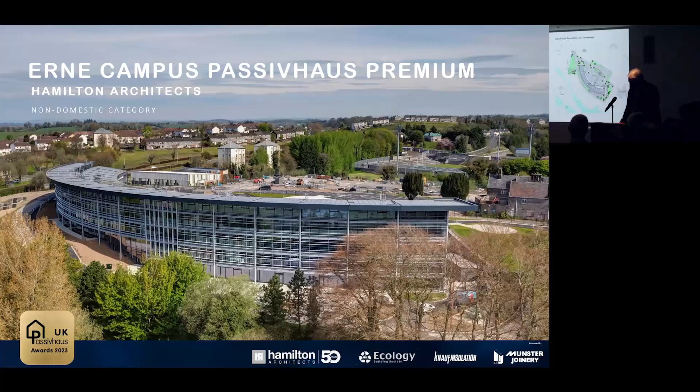There were three central design drivers: educational requirements, the Passivhaus brief itself, and our response to the site. The result represents a true landmark in the town of Enniskillen. Its fully glazed 200-metre-long atrium affords spectacular views across the River Erne and enhances internal legibility. The design responds to the context of the sloping site and curved boundary, and the roof features 3,000 square metres of PV panels.

Good afternoon. Internally, the building has a treated floor area of 7,167 square metres, which includes a large feature atria towards the north facade. The ventilation system within the building is a mixture of mechanical and natural ventilation to deal with potential overheating.

All the classroom ventilation systems are monitored for CO2 and temperature control, reacting to the demands of the building and associated energy use. The shape of the building and the main atria provide significant natural light, which is a key feature, complemented by daylighting sensors to ensure lighting levels are minimised throughout the year. The energy performance of the building has been quite spectacular, I suppose.

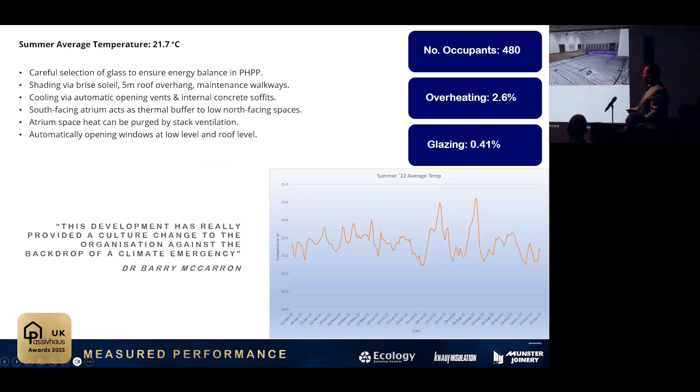As mentioned, the atria space is ventilated through stack ventilation. The building is largely served through a combination of underfloor heating and some air heating in some instances. The main frame is steel with timber frame wall elements.

A huge part of the design process was reducing the thermal bridges within the project. The north elevation is highly insulated timber framing, clad in brickwork and coloured fibre cement boards. Again, thermal bridging was a huge aspect of the design.

For quality management of the project, as part of the design process there was an awful lot of analysis done through the Passive House Planning Package, carefully coordinating the different manufacturers and detailing around the design.

On site, there was very much a collaborative process with the contracting team, learning together, gaining experience together, and that was collaborative from day one. There was a huge upskilling process with the workforce on the contractor's team, making them aware of Passive House, the principles behind it, educating them on the do's and don'ts, and ultimately helping to deliver a successful scheme.

Clerk of Works were present on site to record progress, deal with queries, and convey that back to the design team. Again, that open dialogue was hugely important between the design team and the contractor.

Industry engagement, speaking to specialists, getting feedback and lessons learned, was a huge part of the project as well. Ultimately, air tightness as a key characteristic of meeting the Passive House standard was something we were all very focused on, and we actually bettered what was tabled in the design. We achieved an air tightness of 0.3 in the final assessment.

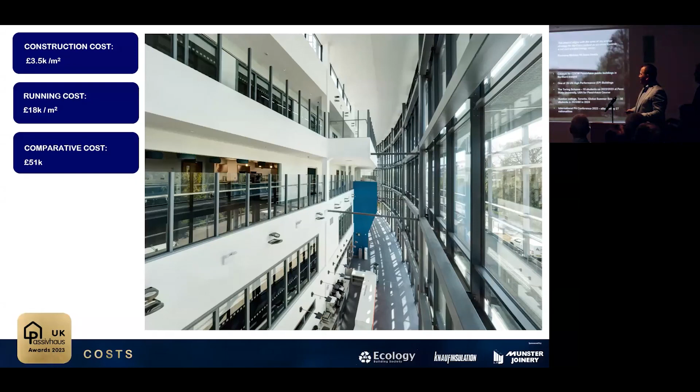This is an exemplary project for many reasons. It's proof that Passive House principles can be scaled up to a large building. The pioneering design has encouraged in excess of £250 million worth of Passive House public sector projects in Northern Ireland. And as you've just been informed, the campus has won many awards and accreditations.

So why does Erne Campus deserve your vote? Because, and I hope you'll agree, it's exemplary, it's pioneering, and it's inspirational. Thank you.

The impetus for this project stems from the college's long history working in the area of sustainable development, and in particular the curriculum to support sustainable development in this area. So when the opportunity presented to build a building, it made perfect sense that we would want to bring all of that experience to bear and build an exemplar building.

We went for Passive House Premium because we had already built a Passive House building in the form of the Crest Centre, and also in 2019 the UK government declared a climate emergency. So going for the best in class, the best standard we could build to, was an aspiration of the governance of the college, and that will future-proof the building.

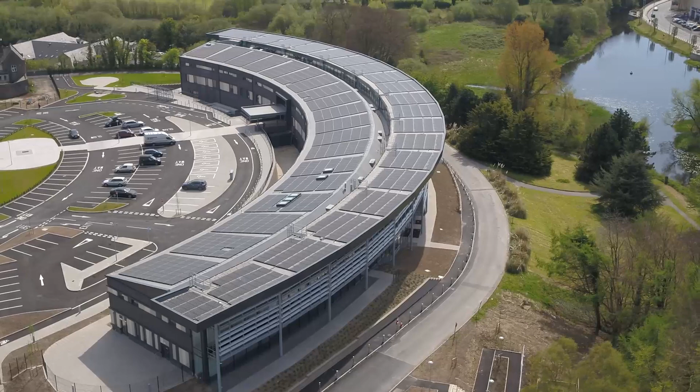It's the world's first Passive House Premium educational building and the largest Passive House Premium building recognised in the UK. The South West College and all of our staff, students and everyone who comes to the college is extremely proud of this wonderful project. I see it really as the jewel in the crown of our estate because it delivers such a great learning environment.

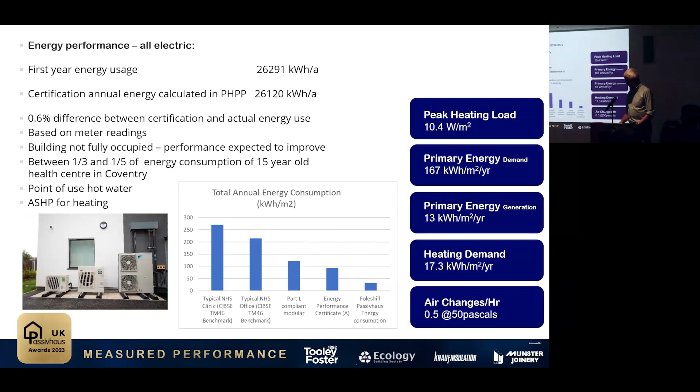But the main challenge for the building is ventilation. NHS technical standards require a lot of air changes. We have 5 consulting rooms for doctors within the health centre, and 2 treatment rooms. Treatment rooms are where you might go to have a dressing changed or some other procedure carried out by nursing or doctor staff. And when those procedures are going on, we need 10 air changes per hour. So if you're used to a passive house standard of 0.3 to 0.5, you need a bit more than that.

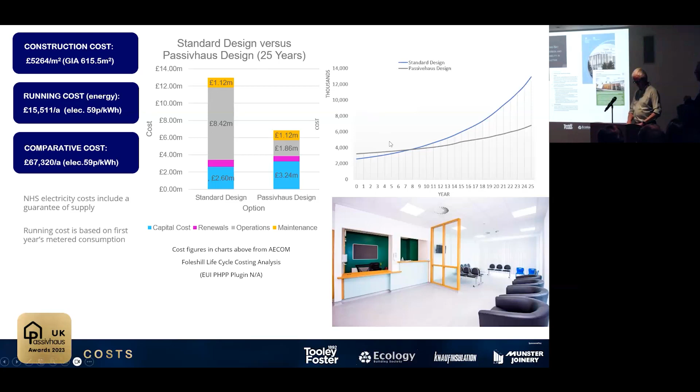We'll just do a quick closing one—I think Julian has done that. The last one is a quick slide on the cost: it's half the price of the equivalent building over 25 years. It's also been published a lot for the government. And the last one is all the people we've done it for, which is the people of Coventry. Indeed, thank you.

The fundamental brief from NHS England is a 10,000 patient list GP practice. So we proposed that we'd use Foleshill as a pilot study, the first passive house healthcare building in the UK. The business case is predicated on the potential savings to the health system. Over the first 25 years, this building is likely to cost about £6 million. A traditional build would be double that.

The brief was use of off-site technologies. We can access the NHS SBS framework, so we had a conversation with a couple of the framework contractors, formally appointing Portakabin to deliver this scheme. We had a flat slab on one day in December, and 3 days later we had a watertight building.

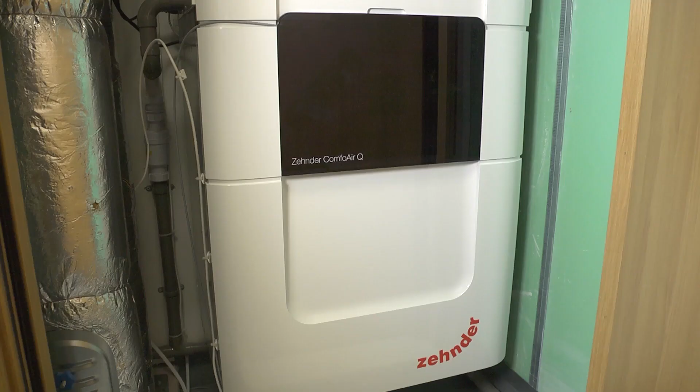The ventilation rates are higher in order to control infection. In the treatment rooms, when treatment activities occur, the air change rate for those rooms is 10 air changes per hour. So in order to meet that standard, we actually had to have one MVHR unit per room for each of those two rooms in order to be able to boost it when dressings were taken off.

There's potentially infections in the air. The performance data, the energy consumption for the building is all exactly as we forecast, and that is a testament to passive house design. This building has proved that the financial reasons for building it are the reasons for doing it, and you get the health and the energy savings as well.

Great, thank you guys, absolutely fantastic project.

Okay, now let's turn our attention to our final shortlisted project in the non-domestic category. So I am thrilled to introduce Hackbridge Primary School, which is a shining example of what can be achieved. It's been designed by Archetype, and it not only boasts remarkable low energy demand, but also generates renewable energy on site. So it's a really exceptional project, and it really helps to show the power that Passive House has in creating really sustainable and inspiring spaces for our children to learn.

So I'm going to introduce Christian from Archetype, who's going to go into a bit more detail on the project for you all.

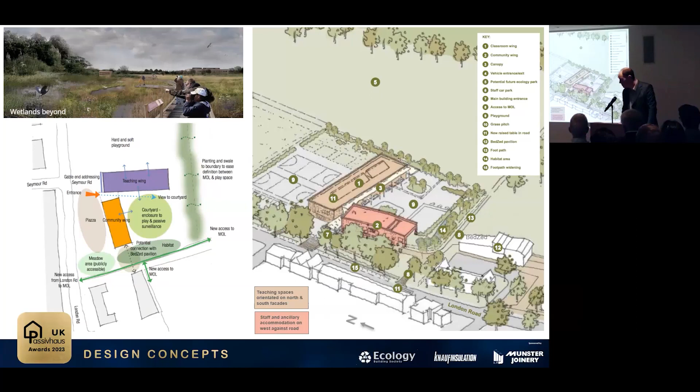It really is an amazing space that inspires the children who are there. High quality sweet chestnut timber cladding was chosen to complement the beautiful site in a pattern that's been described as high-tech log cabin.

We designed the school to be optimum for learning, providing great daylight, high ceilings, excellent air quality and acoustics, and an elegant colour scheme that really enables the highest quality of pupils' experience. The pupils also help to bring their own character through co-creating the wildlife artwork situated throughout the building.

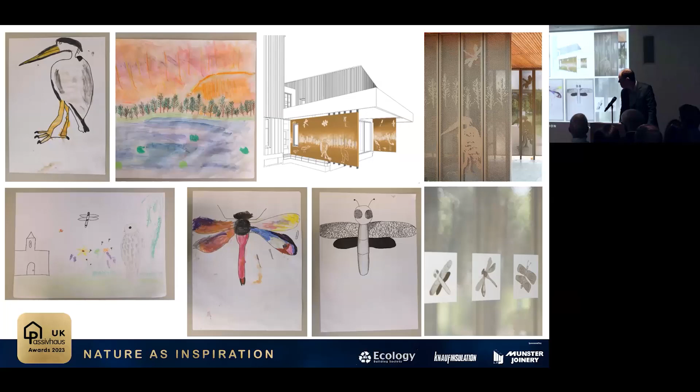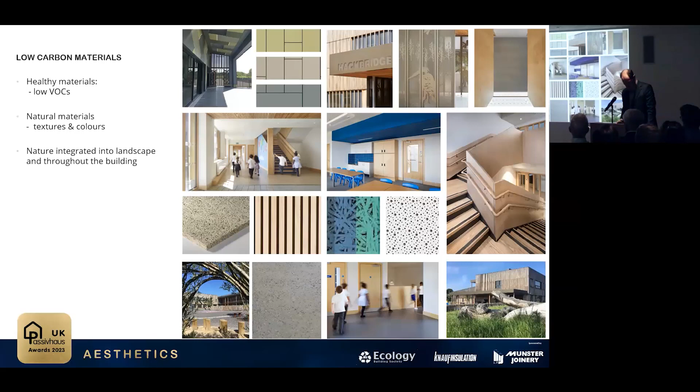On top of this, and on top of the benefits of Passive House, we also look to use a materials palette with low VOCs and natural finishes, which all help to significantly reduce and drive down upfront embodied carbon. So the A1 to A5 is actually only 499 kilograms of CO2e per metre squared without sequestration, or 405 with, which is a really ambitious figure for a primary school of 2 stories.

The design carefully considers orientation, and the amount of glazing on each facade is carefully designed and shaded correctly, with overhang, brise soleil and timber fins on the west-facing facade.

The head teacher and pupils love the space, and they notice the difference between this school and their other schools as they transition between the two.

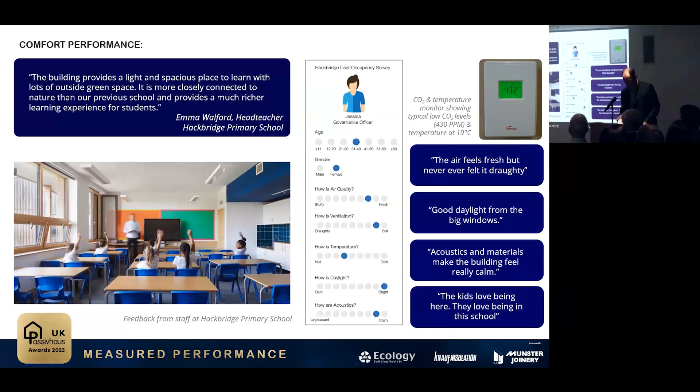We're undertaking building performance evaluation and are confident that we will achieve zero carbon in operation later this year. But it's already significantly above the DFE, LETI and RIBA energy standards.

In terms of construction lessons, going from Passive House to Passive House Plus requires a lot more technology, which can have benefits such as this bio-solar green roof, or the ground source heat pump and thermal store with its free cooling providing resilience against a changing climate. But it also makes it more complex, with challenges around maintenance and delivery of performance of the new technologies rather than the building itself.

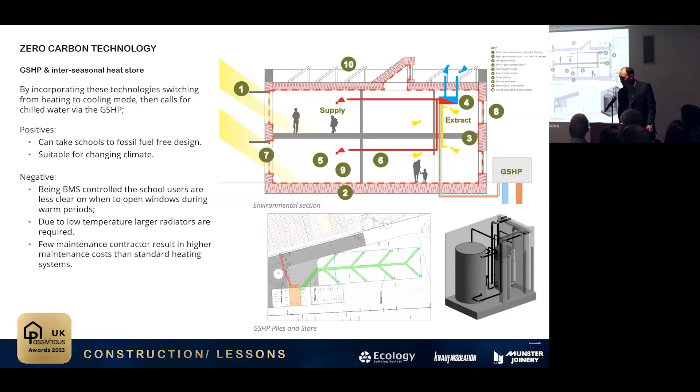But the Passive House standard really does help to ensure that high quality building is delivered. Even through the challenge of the first contractor going into administration, the team worked with the new contractor on site, were clear on the objectives, quality and standards that needed to be met to achieve the final delivery.

The majority electric building costs less than the electricity bill section of a typical school. And those savings, already some £11,000, become even greater as fuel bills rise. See the orange estimate for the changes this year.

With only 15% cost lift for the first ever Passive House Plus school compared to the national average in 2016, of which most is likely from its London location and the high quality materials and other things used, it really indicates that this standard should be readily achievable at or near cost parity going forward.

The exemplar project has been shared widely to really ensure a higher bar is set in our educational design standards, with tours on site with the UK Green Building Council, showing it to the Department for Education and even a member from the Committee on Climate Change, as well as being featured in lots of publications, setting out that the future of education really looks like this building.

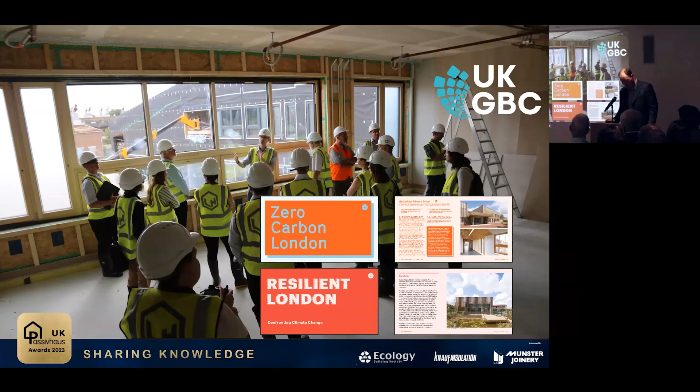We think this project deserves to win, not just because of the above, but because it truly demonstrates sustainability in all its forms. And it's inspiring, and it improves the lives of those attending Hackbridge Primary School.

As my son said this morning when he went to see it previously on an RIBA tour, it's fantastic. Why can't I have a school like that? Thank you.

The setting here is so special. It's a perfect environment for kids to discover nature, for them to explore, for them to learn about the environment.

The site is on a very protected area of the Metropolitan Open Land, just next to BedZED. It meant that in order to get planning, it needed to be very light touch in terms of materiality and in terms of operational carbon performance as well. So Archetype put forward the proposal to go Passive House Plus.

I want you to, in this lesson, think about what makes our school eco. What do we do at Hackbridge Primary School to make our school eco? We've got like solar panels on the roof. And what does that do, why? To save, like, electricity.

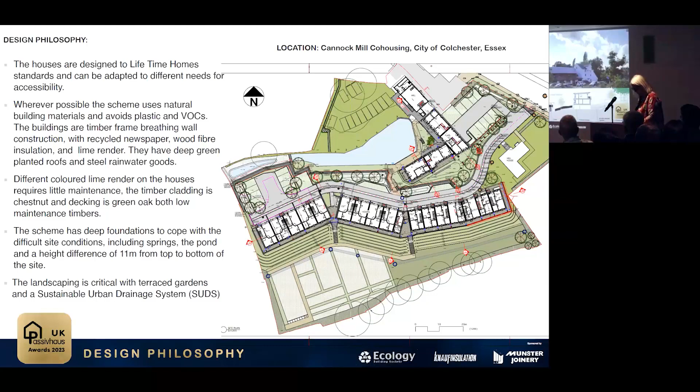The houses are in 2 blocks, one with a passageway, which you can see here, to allow springs and wildlife to reach the pond. 6 flats make up the 3rd block, just over there at the top, next to the listed mill. The site has a large mill pond, with an 11-metre difference in height from top to bottom. The project is within walking distance of the city centre, but sits within the green valley of the River Bourne, bordered by busy streets, including the locally listed Miller's House and the mill.

Deep green roofs hold back rainwater, which is slowly released via the rainwater pipes to the porous road surface, and then filters into rain gardens and into the pond, and finally into the river. No surface water goes into the public drains.

Landscaping makes the most of the existing mill pond. Everyone has private as well as communal space, and here vegetables and fruit trees provide produce for the meals in the mill.

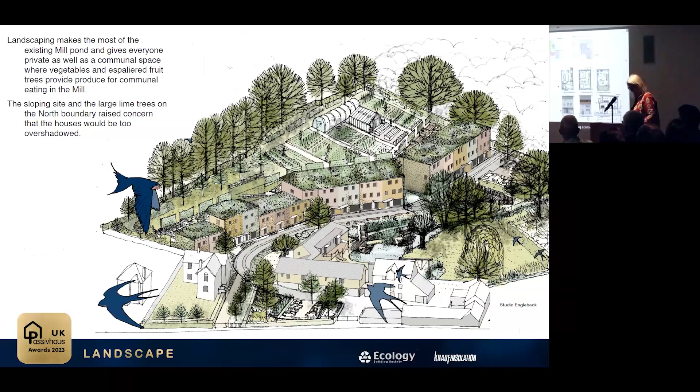Concern that the houses would be overshadowed by the trees on the north-sloping site led to living rooms and balconies on the top floor. The houses and flats are designed to lifetime home standards.

The floor construction allows for a lift to be installed. Staircases are wide enough for a chairlift, with future openings for hoists, etc. Plywood, bamboo flooring, and natural paint finishes create a recyclable and low VOC environment.

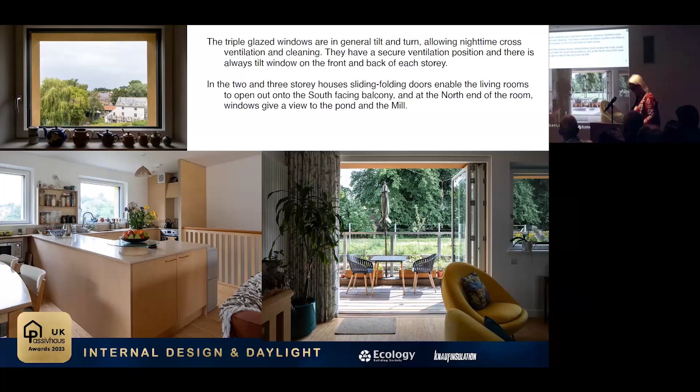North-facing windows give a view to the pond and the mill. Sliding folding doors enable living rooms to open out onto the south-facing balcony, and garages to be multi-purpose — for example, 2 pottery studios and a grand piano, all facilitated by car sharing.

Our PHPP predictions were pessimistic; the houses are more effective than anticipated. The balconies form a means of escape, enabling an open layout where warm air rises to the top floor living rooms. Several occupants have actually taken out the only top floor radiator.

Households tend to be smaller than predicted, and cooking and eating together saves energy. By sharing monitored results from the first year of occupation, the group has seen the value of adapting to and sharing passive house principles, such as nighttime purging.

The summer comfort strategy for houses and flats includes MVHRs with summer bypass and good cross ventilation for summer purging. Tilt and turn windows are secure when open. Houses are away from the main road, so noise is not a problem.

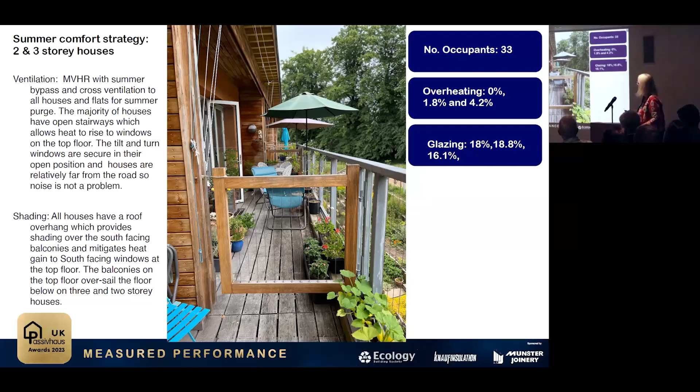3D modelling showed that overhanging roofs would provide shading over the south-facing balconies, mitigating heat gain to the top floor. These balconies also oversail the floor below.

A co-houser said, "I see the sunrise from my bed in the morning, have lunch on my sunny balcony, and fresh air circulates through the house all year. I'm amazed that my heating and hot water costs less than the internet. But above all, I enjoy a peaceful sense of well-being from the light and airy rooms, the bamboo floors, the natural wood staircase, and thoughtful layout."

South-facing windows on the flats have metal external Venetian blinds for shading, security, and privacy, and allow the tilt and turn cross ventilation.

At night, the scheme has a gentle glow, which is just enough to see around the site and get home after a few drinks in the mill, but allows the night sky and nightlife to flourish.

Coloured lime render on houses requires little maintenance. Timber cladding is sweet chestnut and decking is green oak, robust timbers. Windows are factory finished or stained.

The grouping of incoming services in the external cupboards simplified achieving airtightness. Inside, webbed I-beams are used for service distribution and a 25mm service zone in the inner skin of the construction. Combi boilers are easily maintained and MVHR controls are straightforward.

The stud wall timber frame is clearly applicable at scale and could have been greatly simplified on a more straightforward site. Cost limitations restricted the use of energy generation, and we concentrated on fabric first. Blown insulation was economic and efficient, supplemented with wood fibre and sheep's wool insulation.

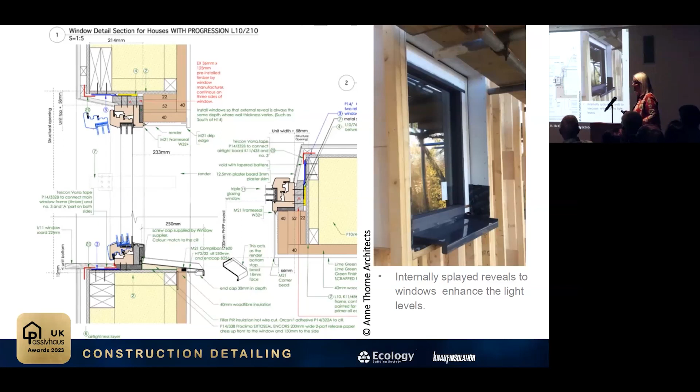What was special about this build? The use of natural materials and breathing wall construction, a challenging north-facing site, a listed mill, and a pond required a bold and compact solution.

The integration of the SUDS system to mitigate against future flooding and protection of wildlife, the incorporation of lifetime home standards, the positive response and involvement of the occupants in the design. And last but not least, the scheme was self-financed by a group originally of 8 households, growing to 23 during the build process.

What would you do differently? Insist on suppliers' installation and better supervision, particularly of plumbing and door and window installation. Use a nominated timber frame subcontractor from the outset for greater involvement in design.

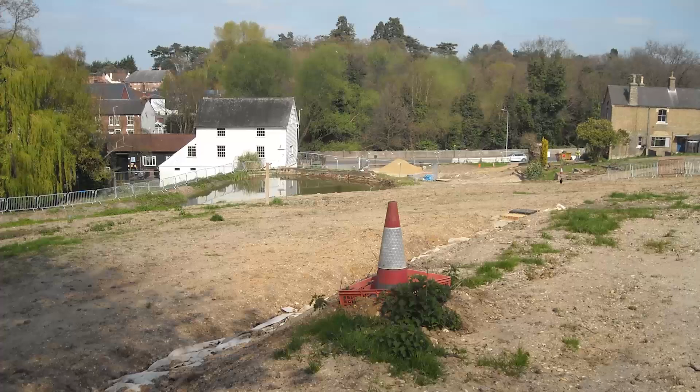It's quite a difficult site. It's 11 metres from top to bottom and north-facing slope. There's also a lovely but challenging mill pond and a Grade 2 historic building.

There were 8 households who bought the site, and with those 8 households we came up with the fundamental design of the terrace, so the mill was perfect for the common house. There was a limit to what we were allowed to do there, but the houses we made to the best passive house standards we could afford, which was Passive House Classic.

I was slightly dubious about the claims made for Passive House, and it exceeds all expectations. It's just luxury because the temperature is even, the air is fresh, and the Passive House really works for me.

What a fantastic project. Thanks for sharing that one, Anne. And it sounds like a fantastic set of clients as well, which is lovely.

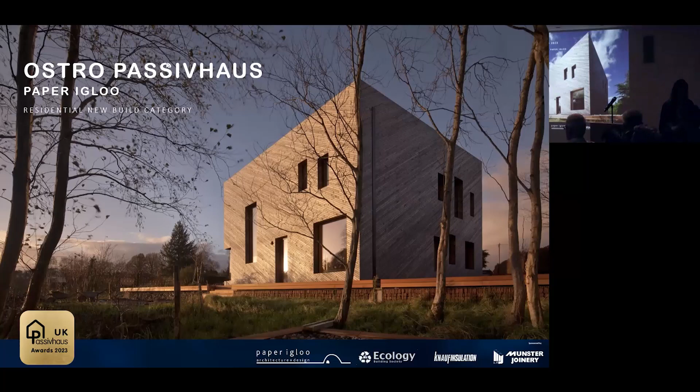Hi everyone, and thanks Sarah. Ostro Passivhaus is a detached family home in central Scotland. In 2017, the building achieved classic certification. It also meets multiple voluntary sustainability standards, has low embodied carbon, and is a dynamic piece of contemporary architecture. The project was mostly self-built by myself and my husband Martin over a 6-year period.

This site is out with the conservation area in the village, and in planning terms constituted a backland development. It's quite a bit lower than the main road, and as we had no streetscape to continue, and the buildings around are a mixture of ages, styles and sizes, we had a certain degree of architectural freedom.

We decided to purposefully set the challenge of designing a simple form with a clear hierarchy of spaces, yet create a building that was more dynamic than it perhaps initially conveyed - a building that could surprise, delight, and create comfortable, livable spaces while still celebrating the contemporary architecture that we love.

Our strategy for making decisions about construction was based on health, well-being, vapor permeability, and avoiding material toxicity. We attained all 8 aspects of the gold standard in the Scottish Building Regs, the highest holistic sustainability level above the baseline. Retrospective analysis has shown that the building exceeds the RIBA 2030 climate challenge metrics, despite all decisions being made back in 2013.

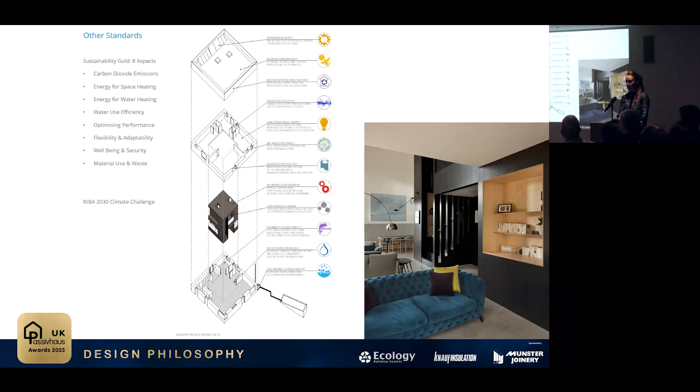One important gold standard aspect is water management. In addition to practical water saving measures within the building, we wanted to give the journey of the rain clarity in the landscaping. The sedum roof covering attenuates about 40% of the rainwater, and any excess empties into an overflow catch pit filled with reclaimed stones, and ultimately to a water butt and rain garden planter below some alder trees. This stone garden also provides excellent habitat for invertebrates and other small animals.

The site is steeply sloping, with almost 6 metres difference in height between the top and the bottom. At the lowest, southernmost end is a burn which flows in and out of the garden, and the building sits at the highest point to maximise views to the tree canopy opposite and across the field to the west.

The principle of form-following function led to this idea of a box within a box. The inner box is a tactile, timber-clad sculptural form present in every space. It is a functional, well-planned core containing all the services, circulation and hidden storage, and so serves the primary spaces to the perimeter. The open plan arrangement around it also creates a fun circuit, which friends, children and our cats enjoy racing around in equal measure.

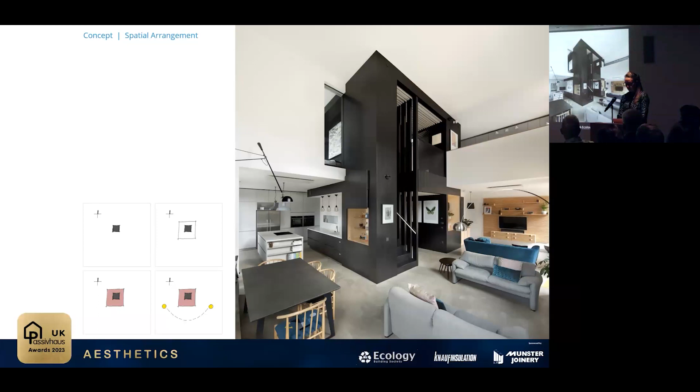The articulation of this core leads to contrast and drama by design. These purposefully darker, calmer spaces always end in daylight, drawing you through the building and leading seamlessly into the bright, well-lit spaces that connect you to the garden outside.

The outer box rain screen of naturally weathered timber cladding, with its seemingly ad hoc yet carefully planned fenestration design, is optimally orientated to take advantage of solar gains whilst avoiding overheating. Kippen has no gas, and some of our neighbours have regular coal deliveries, with oil remaining the predominant fuel in this and nearby villages. This was a critical motivation in our desire to create a low-demand building. In terms of energy consumption, the building is routinely performing within a few percent of the predicted demand.

In terms of heating, we have 4 relatively small IR panels throughout the ground floor, all individually thermostatically controlled, and no heating whatsoever upstairs. This house is the most comfortable we have ever lived in, and the only adjustment we've had to make is switching to a 4-tog duvet all year round.

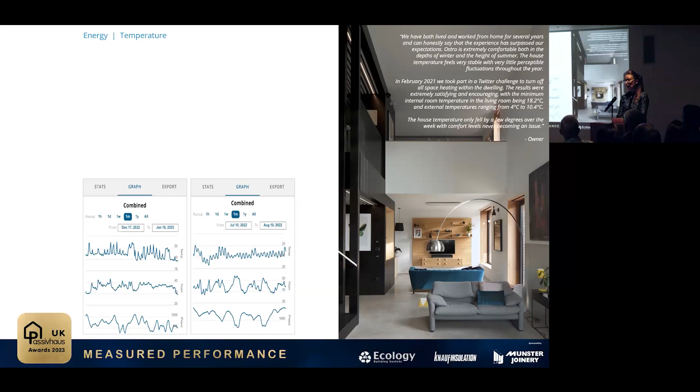are optimally positioned facing south with minimal shading. The building is usually occupied by 2, however, with family and guests, there are often 4 of us.

The certification frequency of overheating was 4% based on the usual stress test parameters. All rooms and circulation spaces have opening windows, so purge ventilation can also take place with bedroom doors shut, and we have 2 roof lights that we can open to increase the airflow.

We have a large double height space in the southwest corner, so numerically we had to offset this by paying particular attention to our psi values. We've continually monitored the temperature difference throughout the building and have found there is very little stratification between these spaces.

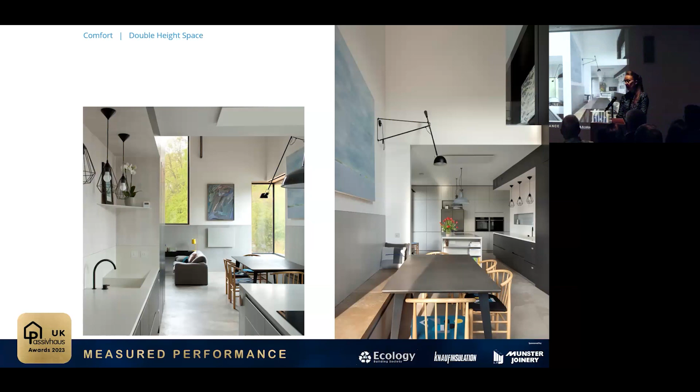We have no external shading devices on this building as we didn't require them to address the overheating. Instead, we utilise the deep reveals created by using natural bio-based insulation, and in combination with purge ventilation, this provides enough shading to be comfortable and gives us lovely deep sills internally.

Material and design choices were all guided by our approach to create a healthy, low-impact building. We paid careful attention to minimising waste during construction, completing the build with no soil being taken off-site and without a single skip. All surplus material was either recycled or passed on to others to use elsewhere.

We had a strong desire to keep the detailing simple to execute. At the outset, there were very few suitable timber frame companies in the UK. However, now we could use a specialist who would erect a bio-based frame within a week. I kept a detailed blog throughout the whole process to share our journey and hopefully aid others in their pursuit of a similar self-build.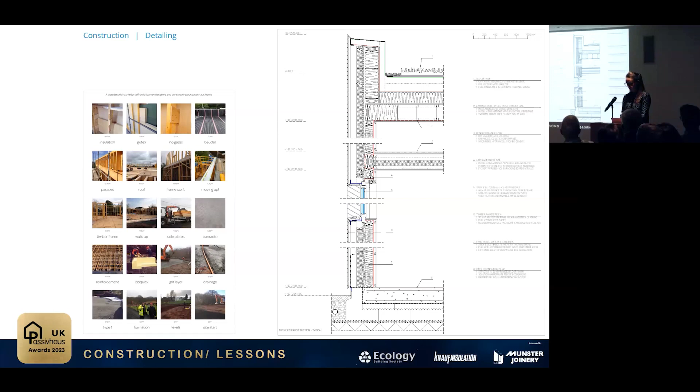So we built a Larson Truss timber frame over an Isoquick insulated raft foundation with an I-joist flat roof structure. The whole building is filled and finished wherever possible with wood fibre insulation, along with wood-based vapor open boards, one of which doubles as the AVCL.

A retrospective analysis confirmed that our material choices have created a very low carbon building. If the architectural features, such as the diagonal cladding and internal joinery, were stripped away, at its core, this building is of simple construction and straightforward detailing.

For us, this home is a demonstrator, combining contemporary architecture with an exemplary approach to sustainability. By caring for both people and planet, we can limit carbon emissions whilst maximising health and well-being through joyful and creative architecture. As it was a self-build, the construction cost was inevitably low.

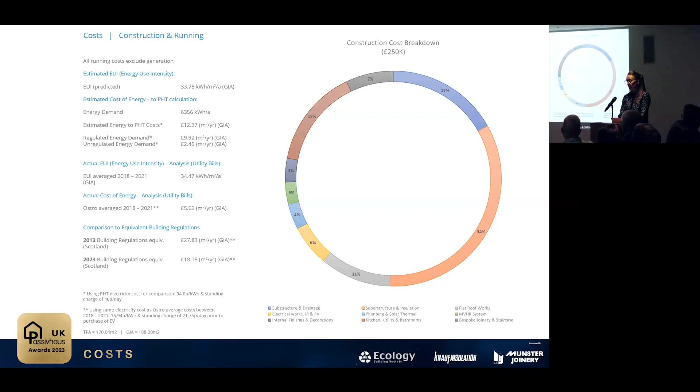Here you can also see running costs, noting both the Passivhaus Trust unit cost for comparability alongside our actual running costs before we got an EV in 2021. Ostro only uses 21% of the energy of an equivalent 2013 building regs building and only 33% of the energy of an equivalent building built to the 2023 Scottish standards.

For us, this house delivers a key message. The materials and technology required to achieve Passivhaus certified low embodied carbon buildings have existed for many years. The minimal environmental impact of this home is translated into a minimal architectural vocabulary. Nothing is unnecessary or superfluous, and all parts meaningfully contribute to the story of the building, its beauty and durability in the face of the climate crisis.

When we decided to build this house, we knew we wanted to adopt a fabric first approach so the building would minimise energy demand before turning to lots of renewable technologies. So to do that, we decided to go with Passive House.

We knew from the outset this would be a self-build and done on a tight budget, so although we got some support and help from our friends, the two of us built and finished most of this house in our free time alongside running our architecture practice.

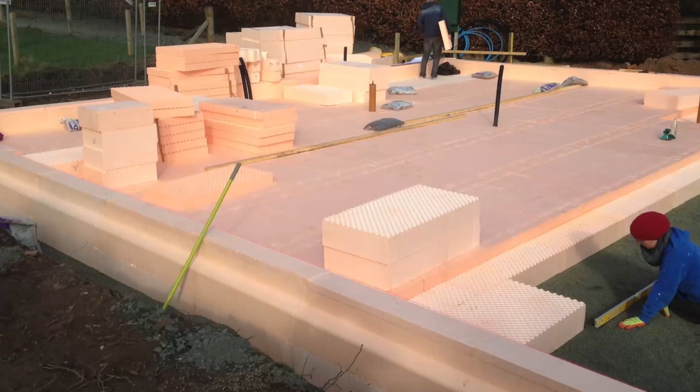In addition to Passive House, we wanted to make a really holistic, sustainable building, so we made careful material choices, prioritising natural materials whenever we could. We decided to meet the voluntary gold standard in the Scottish building regulations, which requires a higher level of performance in relation to other aspects such as acoustics and water saving, for example.

So our main goal was to combine these sustainable ambitions with a home that had some drama and excitement and overall is just a pleasure to live in.

Internally, the spatial layout clearly articulates the architectural concept, and so everything is organised around this exquisitely crafted, black-stained timber joinery element, a box within a box that houses the stair and all of the wet functional spaces and features secret storage compartments. This spatial arrangement then allows the living spaces and the bedrooms to receive all of the daylight and the views to the garden and the landscape beyond.

What we've enjoyed most since we've been living here is really how comfortable it is. The monitoring we've done has shown the predicted energy demand to be exceptionally accurate, and this experience has altered our company's course by embedding a commitment to design all new build projects to the Passive House standard.

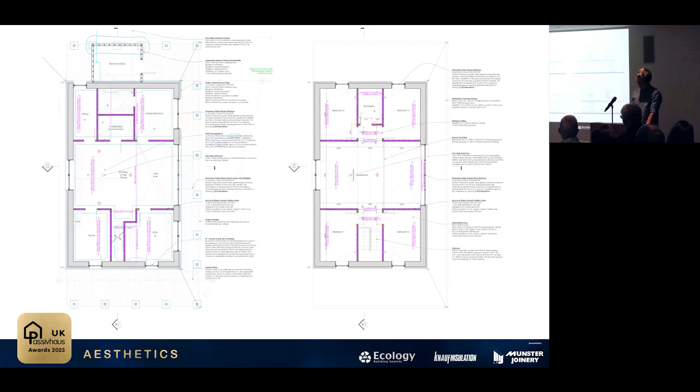The design has been carefully considered to maximise winter solar gains and occlude direct summer sun. This has driven the elevational design, with glazing concentrated on the southern aspect, protected by deep reveals and extended eaves. A veranda wraps around 3 sides of the house to augment the solar control and provide valuable covered space against the Welsh weather. Combined with summer bypass on the MVHR, these passive solar control strategies deliver 0% risk of overheating, with no need for occupant intervention to maintain comfortable internal temperatures.

Views of the wider landscape are presented through generous glazed openings off the double-height living spaces. A double-height volume connects these living spaces across the 2 floors, amplifying the effect of natural light and extending the outlook across the countryside. Window design establishes favorable ratios of glazing to frame to minimize heat loss and maximize the benefits of solar gain, daylight, and of course the vistas.

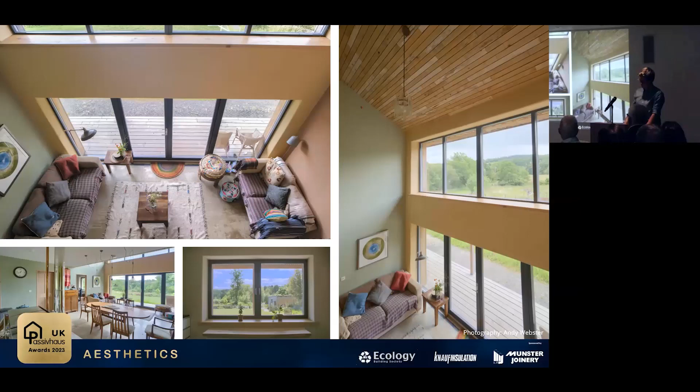The predicted EUI is inflated by the relative inefficiency of the heating and hot water supply, a wood-burning stove that sits in the middle of the house and on which meals are prepared. However, despite this focal point, the measured energy use last year totaled just 39.54 kilowatt hours per square meter GIA.

This comprised 15 kilowatt hours of electricity supplying the MVHR, lighting and other unregulated demand, and approximately 24.5 kilowatt hours of biomass, fulfilling heating, hot water, and cooking requirements. This is in part testament to the efficiency of the building, but more so the determination of the family to consume less.

Temperature and humidity were monitored throughout January and February, and as expected, the overwhelming trend is one of consistency. Regardless of external temperature fluctuations, internal temperatures were stable around 20 degrees. While humidity starts high, reflecting the recently applied clay plaster finish, it soon settles around 60%.

Similar trends are observed in summer. External temperatures varied from 10 to 34 degrees. Internally, the temperature range was 3. Humidity appears slightly more chaotic, but ultimately smooths the peaks and troughs to maintain a range of 50 to 70%.

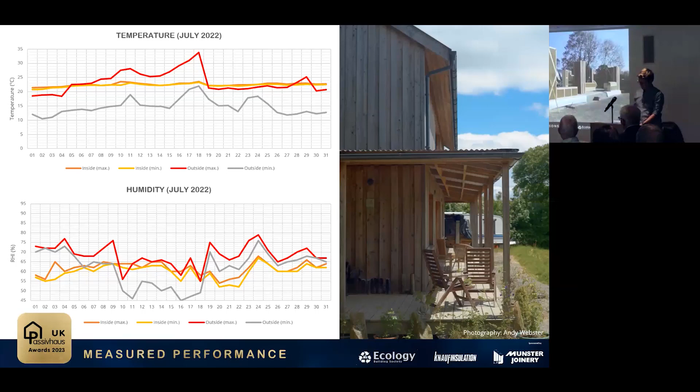As my first Passive House project, and one on which certification wasn't resolved until after building - obviously not recommended - specification of high quality and often Passive House certified components and systems ultimately made it possible.

EcoCon's certified SIPs comprise the majority of the external envelope, with foam glass installed below slab and blown cellulose between the composite timber roof purlins.

Using thermally broken straw-filled panels had the distinct advantage of a ready detailed range of Passive House compatible junctions, and they arrive in great hairy blocks ready to be maneuvered into position.

Hawkland Group, the experienced natural builders who put the thing together and now practiced Passive House deliverers, were on site and led the assembly, followed by Di Rees, who provided expert air tightness guidance to the clients.

Starting on site in the summer of 2020, we were very fortunate that despite the unprecedented events, the knowledge of the contracting team and robustness of the products delivered the building to the aspired standards.

Familiar to all good natural builders, the main concern was ensuring adequate protection to and detailing of materials to ensure they could easily shed water. West Wales is not known for its dry spells.

A huge challenge, and one wholly undertaken by the client, was ensuring an adequate energy strategy. As an off-grid development, Parker Rodin cannot import electricity to meet shortfalls on those consecutive dark winter days. This was critical in resolving to meet heating and hot water demand with biomass, as it greatly reduced essential electrical needs, allowing for relatively lean generation and storage capacity.

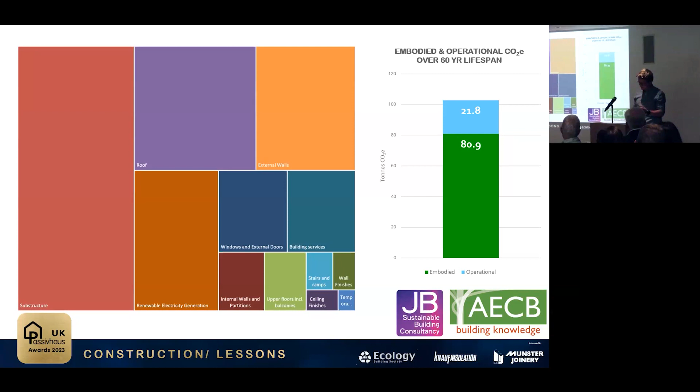Conversely, as all electricity was generated on site, the only operational costs incurred were biomass at a rate of approximately £2.29 per square metre of GIA, less than 10% of the equivalent building regulation compliant dwelling. Maturation of the development will see this reduced to zero, as on-site forestry is anticipated to meet 100% of biomass needs within 24 months. In its rural context, sufficiency is its greatest accomplishment.

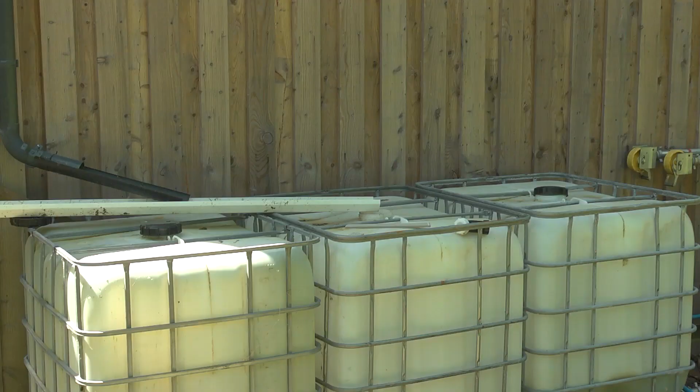So we applied for planning permission under the One Planet development scheme, which is a Welsh Government initiative where you can build on agricultural land, but you have to have a sustainable project, supply your own energy, deal with your own waste, have a zero carbon building, etc. So it's quite a difficult thing to meet all those requirements.

We didn't want to build lots of different buildings on the plot. We wanted to keep it all together, and we thought this is a very cost-effective way of doing it. So it needed to be a very functional, almost farmhouse, where we can process all our crops.

We always said if we are ever going to build a house, we want to build a passive house. The aspirations for this project have always been aligning with the One Planet ethos, which has really driven everything, all the choices. So we were looking to achieve something that would be low operational energy and low emissions for the lifetime of the building, but Brendan and Ludka were also really keen to make sure that it had low embodied carbon.

Overheating was a fairly critical aspect of this. We wanted to make sure that Brendan and Ludka wouldn't have to use any form of active cooling, and that resolved itself into the idea of having that large veranda-type canopy at ground floor and the extensive eaves at first floor, just to make sure we had protection there for the duration, rather than needing anything mechanical or operable during those summer months. In the winter it's nice and warm, and if it's a sunny day in the summer it's just cool, and it stays a constant temperature. When it's really cold it's nice and warm in the house.

This should be a standard way forward. Houses should be passive houses.

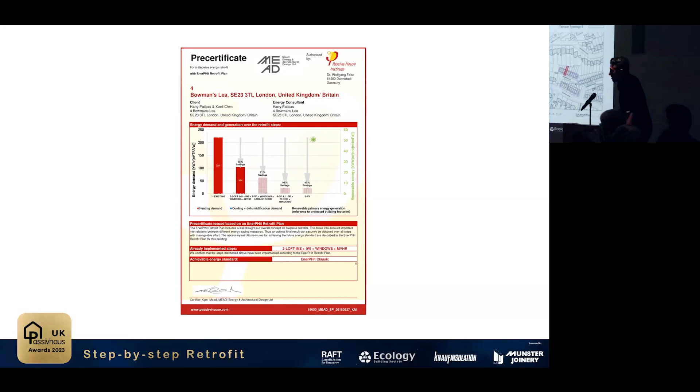We've had an enormous range of sustainable approaches on this project, including opening it to International Passive House Open Days, having Passive House students round on a visit, and we've also leafleted the whole community to try and reach beyond just this one project.

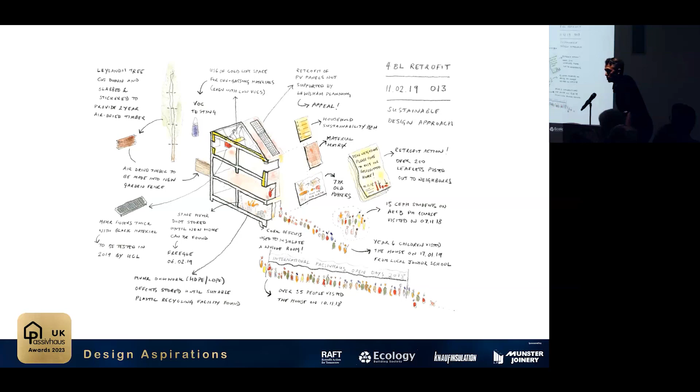The house now has triple glazed windows across the whole house. We are airtight, we have MVHR, we have come off the gas, we have an ASHP heat pump, we have solar panels on the roof, and a solar shading strategy. So we've basically put all our money into the performance.

It is actually unfinished inside. It's livable, but as you'll see in the video, we still haven't put all the money into the actual finishes. We have 3 finished rooms, which are the nice photographs you see, and we have cork finished multiple ways. This is cork with a fire retardant and a white paint, so you actually see the texture of the cork through it. This is cork finished in a different way.

And this is my son sitting down, which is quite rare. This really shows the deep reveals on the windows, created through the additional wall insulation. So we have cavity insulation and wall insulation, internal wall insulation.

Last year we made slightly more than the predicted amount from the solar PV, about 3% more, roughly 4,000 kilowatt hours, and we used 3,700, including charging a car. So we've really delivered performance, and we're delighted with this. Obviously this coincided with the energy crisis as well.

This is a quick thing about the solar shading strategy. I've long had a hunch that solar panels reduce heat gain in roof spaces, and my neighbours agreed to put a sensor in their loft space, and I have one in our loft space and one in theirs. I can report that our loft space is 2 degrees cooler at the height of summer, so it does have a small impact.

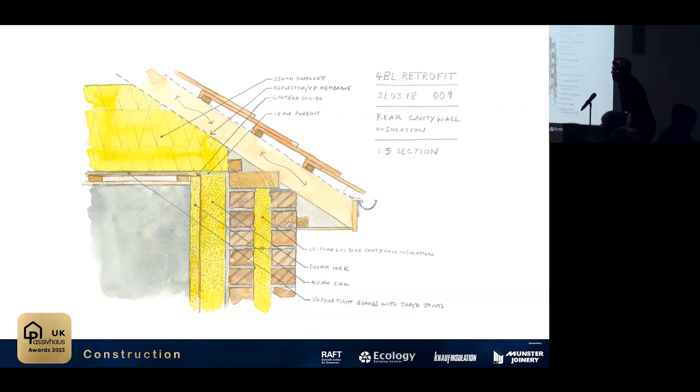This is a recessed area on the ground floor. We converted a garage into a new space, and this is just a bit of air tightness on the ceiling. We have MVHR, and on the video when you see lots and lots of air supply in the living room, that's because we're renovating the ground floor and we brought the MVHR up to the first floor. So if you're wondering what's going on.

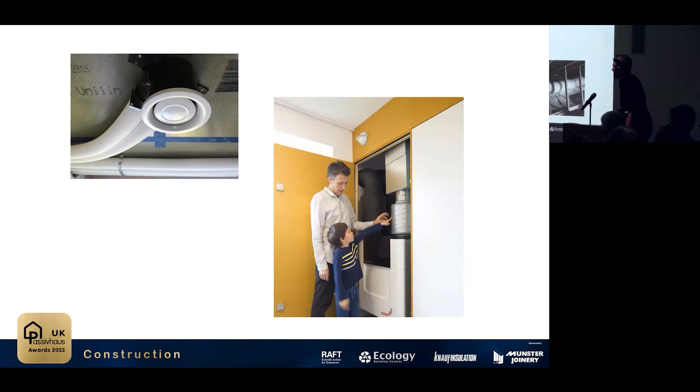So that was the insulation before. This is what we usually find in roof spaces across most dwellings and schools that we visit. And obviously now we have a really neat 350 mil of insulation. We've replaced the windows with triple glazing.

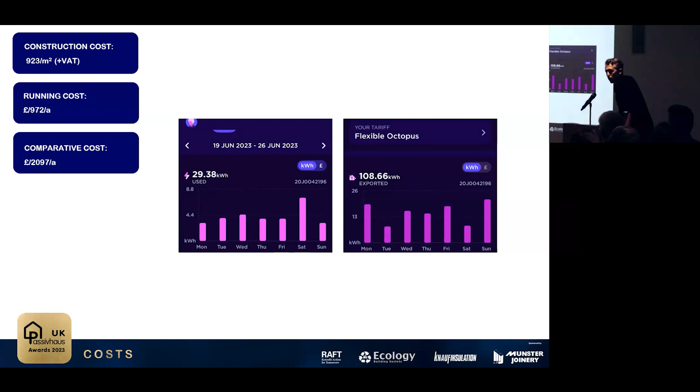We've monitored a lot - that's my son looking into a hole that I drilled in the cork in the wall, very excited. So we've been monitoring the hygrothermal performance of the house, monitoring air quality, relative humidity, CO2, and temperature. We've obviously got metering through Octopus, and we've also got Smappee, so we've got live energy monitoring for all of our circuits in the house.

Perhaps this is one of the most important aspects of the project - these are the 10 houses on our street. This is my son with a poster that we created for the climate march. He created a poster, and at the end of it he said, 'Now we feel warm.' It's a really important thing.

Number 8 has actually copied our exact windows, and they've put triple glazing in throughout their house. They're absolutely delighted, and they're also going to get solar panels soon. Number 1 are architects, and they've been picking my brains for retrofit solutions. Number 5 has put in double glazing and just put in cavity wall insulation.

That's Brian. TJ, number 2, has actually sought a lot of advice from me on asbestos. All the houses have asbestos, and me providing that advice has I think been really helpful to them because we removed it all from our house. He's actually starting retrofit work soon and going to be insulating his loft. Paul is number 9, and he is going to put triple glazing in very soon.

So here they all are, and they are all genuinely doing works. These are the types of fabric measures that they'll be doing, and these are the additional comfort, air quality and overheating measures.

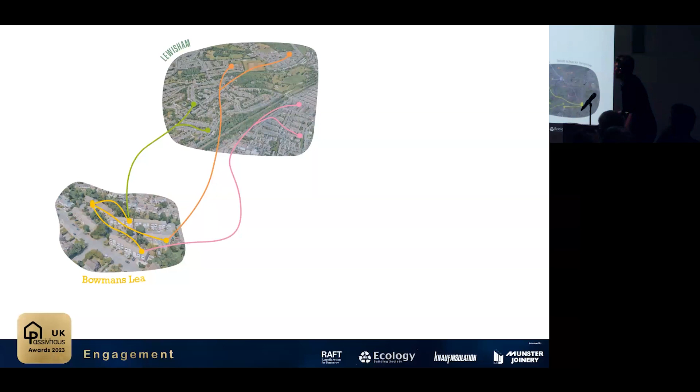Lastly, this is really about community retrofit. So we are influencing our local area, and we're really keen to let that reach beyond into the borough of Lewisham and then ideally spreading out across the country. I'm really happy to announce that Bob Pruitt and I are going to be writing a book. This is going to be published by the RIBA, a book on domestic retrofit, and we're just about to sign a contract - it will be coming out in September 2024.

What we've done is we've brought our work to bear from this house into schools. This is a drawing produced by Raft that shows how the interactions and engagement we do with schools is reaching out into the community. A lot of the learnings we've done on my house and other domestic projects we've brought to bear into the setting - this is a section through a school. We've actually brought our air tightness, engagement, MVHR strategies, and cavity wall insulation details to bear on those projects.

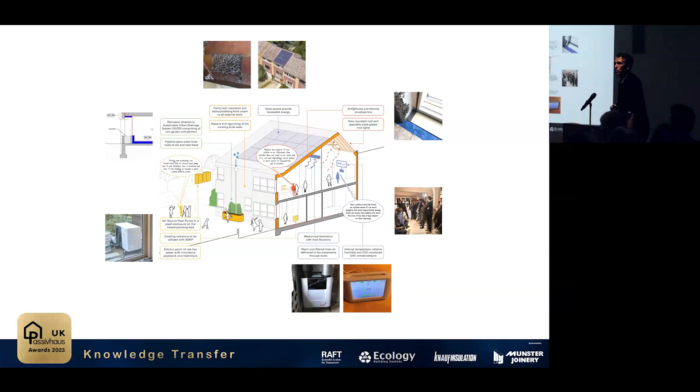This is some of the engagement we've done - these are all pictures around the house at different stages of construction. Actually what we found is a half-finished house is great for visits because you see everything, you can see all the details. This is the engagement work we've been doing with schools all across London, and this is a very recent output.

We're working with a number of schools across the borough of Lewisham. And I'm just going to end on this slide - but I have to say, we are very lucky to have freehold, we're very lucky to own our home. And I feel very lucky that we found Passive House as a way of delivering fantastic performance. So thank you very much.

Hi there, welcome to my house. My house is the UK's first step-by-step passive house retrofit. Come inside and have a look with me.

We've got cork insulation here to keep the cold air out of our house in the winter and the warm air out in the summer. Another triple glazed window, also fully airtight. These are filters for the MVHR system.

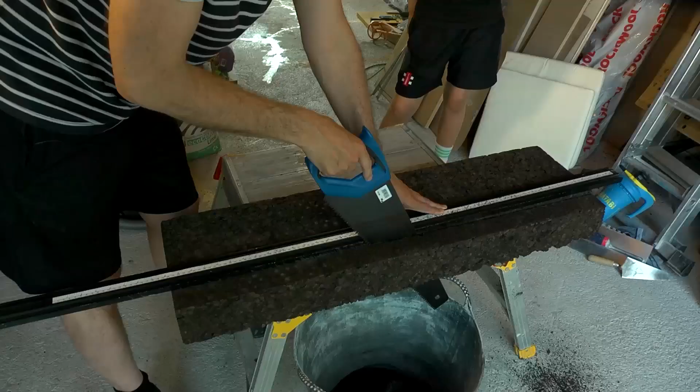Hi Dad, what are you up to here? I am cutting the very last piece of cork, and then I'll be mixing the plaster. Do you want to have a go? Sure, yeah, okay. So make sure you keep your hand on there really carefully. You don't move this because this is your guide, and then you just go up and down.

I've helped him before, lots, but I've never actually done some cutting. So that was a great experience.

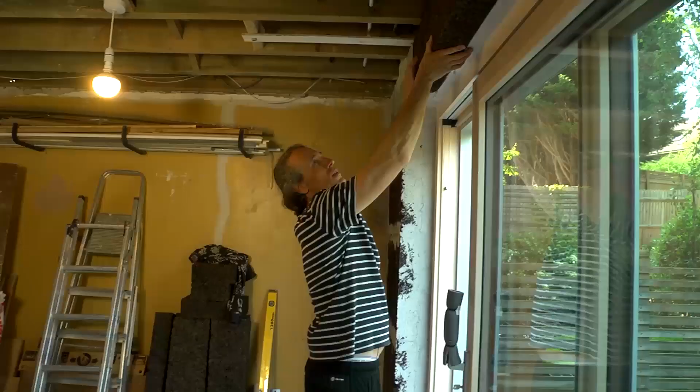There are certain walls around the house where he's had a go at plastering, like one on the landing upstairs. He showed a lot of interest, and the posters he made captured little moments of what we were actually doing in the house. And then your school teacher let you put them up in the corner of the room, didn't she? Yes. I felt very proud of myself because completely insulating our house is also very special.

What would I have to do to make it all nice and retrofitted? Take out your gas boiler and then replace it with a heat pump.

It was just a complete added bonus that Dimitri was genuinely interested in what we were doing. That led to his posters, which led to him presenting to his school, which led to us creating workshops in local schools, including his. And of course that led to the formation of Raft.

I've noticed, because I'm quite interested in that due to energy prices soaring, the panels on the top of the roof. The solar panel gets the sunlight and then creates more energy for us to use.

We want to work with schools, work with families, work with children, work with neighbourhoods like this, and try to encourage people to retrofit their homes. So there is impact. Here's to neighbourhood retrofit.

Absolutely fantastic. Here's to neighbourhood retrofit everywhere, I think.

I would like to welcome our next speaker, Heather McNeil from AD Practice, as she shares the journey of another suburban home—this time a 4-bed home in a conservation area. This project demonstrates how they were able to get to an EnerPHit Plus standard. It's a way for us to retrofit our buildings to lead in the climate action needed everywhere, but doing it sensitively to the architectural heritage of the area, which is also really important. They've maximized the use of things like photovoltaics, eliminated gas usage from the building, and got it closer to net zero carbon. It sets an example that can be replicated at a larger scale as we look to take this from the individual building to the neighborhood scale. So Heather, over to you.

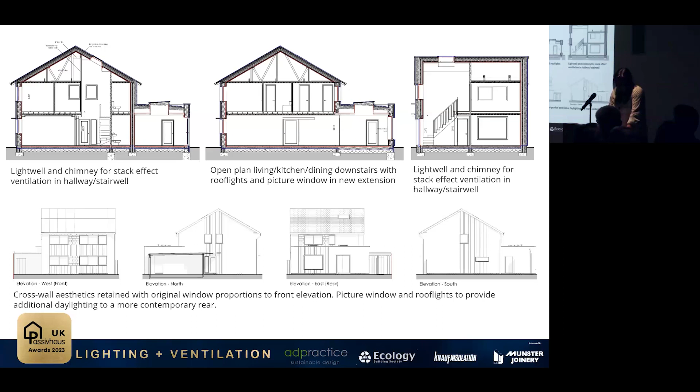So how's it working? Due to the amount of energy generation within the building, it is hard to quantify the exact proportions of energy usage, but it is clear it's outperforming the PHPP predictions by quite some margin. We've got actual heating demand of just 35% of the predicted value in PHPP, and primary energy demand is just 54%. The energy generation prediction was remarkably accurate at 97%.

In terms of why it works so well, a lot of it comes down to our clients, one of whom was a software engineer. He's installed a Loxone building management system, which controls all of the overheating strategies, as well as optimizing the usage of the solar PV to run the heat pump, charge the battery, and car charging in a hierarchical manner to try and make the most of the energy generation that they have.

The MVHR goes on summer bypass, and again the Loxone system in summer is configured to control the stack ventilation once temperatures reach the overheating threshold. It also controls the shading - there's external integrated blinds in all of the front windows and the master bedroom, again programmed with local climate data to prevent unwanted solar gains in summer.

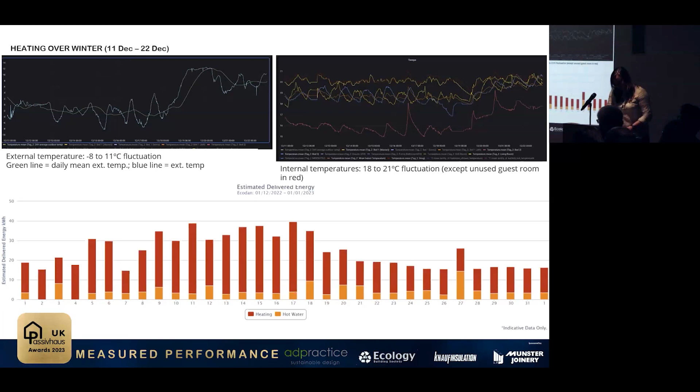In terms of our internal temperatures, they're fairly consistent year round. The living area varies from 19 to about 25, and the master bedroom, again, from about 18.5 to just over 26, which is too hot for a lot of people in a master bedroom. So despite overheating being very minimized within the PHPP, we did have to look at some additional cooling.

There's a few snapshots of some construction. I'd love to be able to talk you through it all, but I definitely don't have time to do that. But do ask questions later on if you have any.

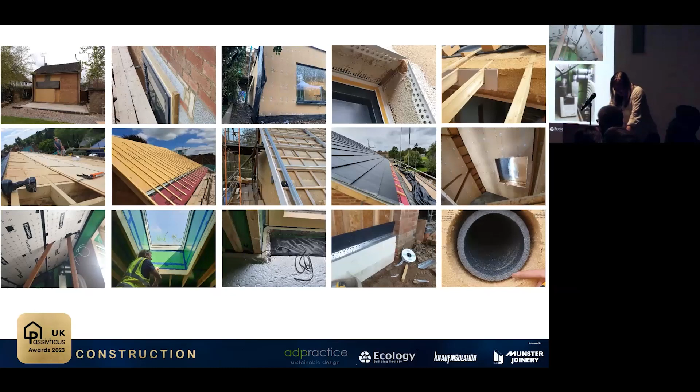Our client's main driver for the project was to reuse as much of the existing building as possible, none of which was straight or plumb, so it did make the roof particularly difficult to make airtight, and old external walls that travelled inside as part of the extension works also became very difficult to airtight, because clinker block apparently does allow air to travel through it remarkably well.

In terms of our buildability features here, I think we've touched on it before - it's certainly a replicable solution that we had. The cross-wall infill panel system is very common across the UK in properties of this age, and it is perhaps a little bit more bespoke than some of the external insulation options that we used on some of the flank walls, but certainly not beyond the wit of man to be able to replicate.

Most details we used were as simple as we could make them, but we did have quite an interesting insulated box beam, which you can see on our section detail here on the extension.

Turning to the embodied carbon, this is where it got a little bit tricky due to the high amount of solar PV that we have. So the headline figure is quite high, but recent reports have shown that PV saves roughly double the amount of carbon emissions embodied within the arrays. So it's perhaps not the most accurate reflection of where we're at in terms of embodied carbon. But because of the high sustainable materials that we use, the sequestering within the materials, particularly the wood fibre and timber products, left us at a net negative figure by quite some distance, and allowing for the fact that most buildings last for longer than 60 years, which is the average that people are rating within this system, it could be a lot more carbon neutral than it in fact first appears.

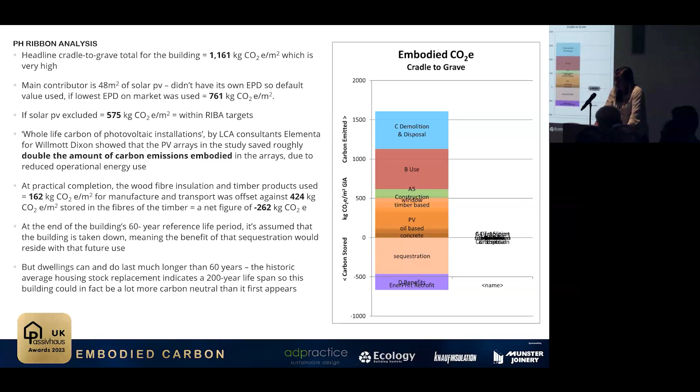Pre-retrofit, the clients were freezing, sitting under blankets, working from home, and had annual running costs of about £2,500, including both gas and electric. Post-retrofit, we eliminated gas, and their annual heating and hot water costs were just £93.56, so less than their internet costs, and the total annual running cost was £750. This has given us already savings of £1,750 a year, which are only likely to increase with increasing energy costs and the fact that they've now installed a large 10 kilowatt battery.

Finally, lessons learned. We're taking it forward onto future projects. As you can see here, we've got a PHI low energy building in St Albans in a retrofit situation on an end of terrace, which is perhaps a more replicable solution because there's many more of those. But I would say the main learning feature for us was the overheating aspect, and factoring in that PHPP only models overheating on an overall building basis rather than room by room. I do think it's something we need to think about, particularly on retrofits where we have less control over some of the orientation. Where we've got first floor bedrooms, we do need to look at how it can be cooled a little bit better because they are just too hot. So it's factored in for our future clients.

But yeah, I think take home point, if I can do it, I think any of you guys can. So thanks.

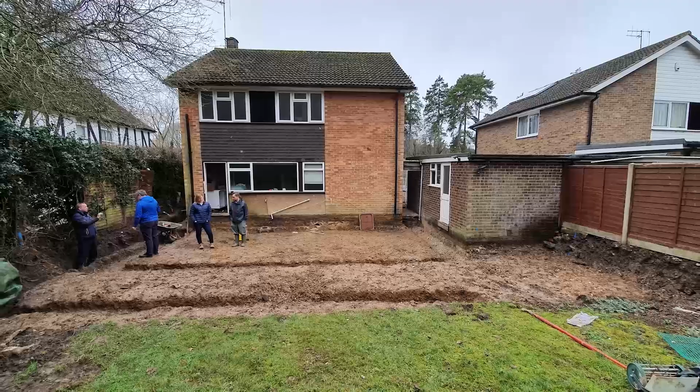But it was very dark. So I think our design driver was obviously make it a lot more efficient, but try and increase the amount of natural light throughout. Adding on the sort of box to the end, just to give you that extra bit of flexible living space. The floor was definitely the trigger point for, are we going to try and push for EnerPHit Plus? It's a lot of work, but it's not an insurmountable problem. Issues with old roof construction, nothing being straight or plumb. In hindsight, it would have been easier to replace it.

What's made this project more striking, with it being in the conservation area, is that you do have the whole front pitch as a solar array, and everyone knows it. The really nice thing about the passive house process from my point of view is traditionally on a build the client would just think about what the building looks like and a little bit about how it functions, but it invites a lot more curiosity. As a client you can actually be aware of what goes into the building, what's inside the walls, and I think that leads to better results.

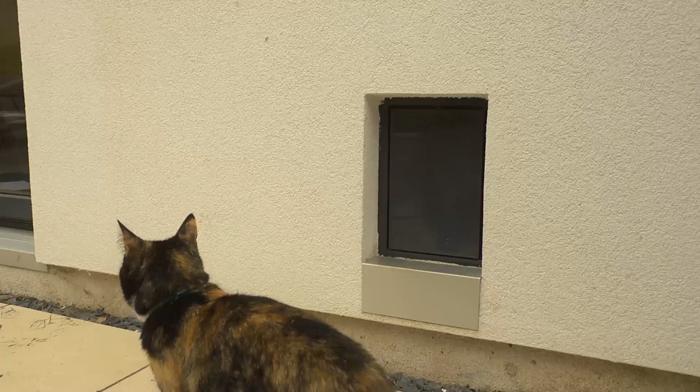I'm working away on the video call in t-shirts. At various times I've got colleagues under quilts with woolly hats and fingerless gloves, through to working in the garden in the shade because it's cooler than indoors, but I can work in here in comfort. It goes to show what you can do with a lot of building stock of this age.

Thank you, Heather, for that presentation. That was fantastic. I didn't realize this was your first project, your part 3 project. How fantastic is it for an architect graduating to design a building with no performance gap? Well done.

Amazing. That's great. Let's hope all architects graduating could do that. That should definitely be the aim. Okay, fantastic. So I want to introduce our next project.

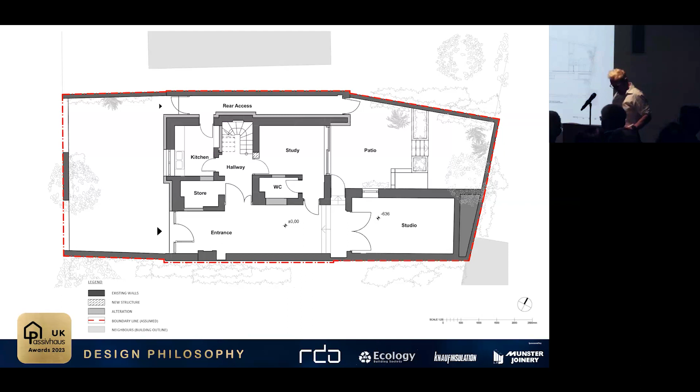The first floor, again, was simplified with walls removed, creating 3 bedrooms instead of 4, and having a reasonable sized master bedroom - before it was actually very tight. The new layout improves the connection with the garden, which is quite interesting because we've got a rainwater harvesting system in there as well, and there's a lot of circulation and reuse of the water in the garden.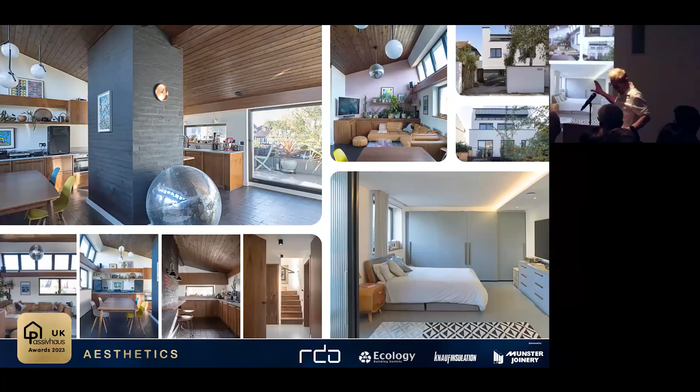This is the second floor main living space, one of the favourite spaces of the clients. Aline, she's here - a favourite, I think it's one of your favourite spaces, isn't it?

A lot of attention was given to the wooden joinery, which was really important as it keeps this 1960s aesthetic - we didn't want to lose that. The big issue was how do we lower the amount of glazing, and we had to triple glaze all those fan lights. That was quite an issue because before that it was single glazed, and that caused a lot of problems.

How would this work for future use? A lot of it was about the energy performance, but we replaced the roof with a solar roof - the actual solar panels are the roof. The heating demand is obviously lowered. We've got an air source heat pump, a Mixergy tank, all the help from Ecospheric, and a Tesla Powerwall battery, which, to be honest, made the building management system quite complex.

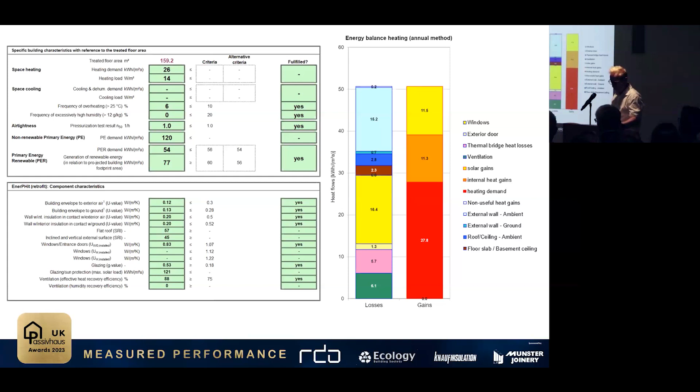PHPP estimates 6% of overheating per year. The total glazing is around 24% of the treated floor area, however this is balanced with the use of triple glazing windows on the east and west elevations. The summer ventilation strategy is planned so there's no need to open windows while the MVHR is in use. A large proportion of the heat losses are through the windows and doors, so that was something we really needed to be careful with.

Working with an existing precast concrete building and blockwork was really difficult - we had to think about how we would get everything into the tight spaces. We used an MVHR system, and the process of installing this was fraught with difficulty, including trying to incorporate all the ductwork into existing buildings. We're still monitoring the building and its use and adding tweaks as we go - it's only really been there for about a year.

There was a bit of a peak in the summer until we got our shading policy in place, and we've dealt with that now. The windows were taken out and everything was moved, and we got rid of the render on the outside. You can see the complexity of some of those junctions, which was really, really difficult.

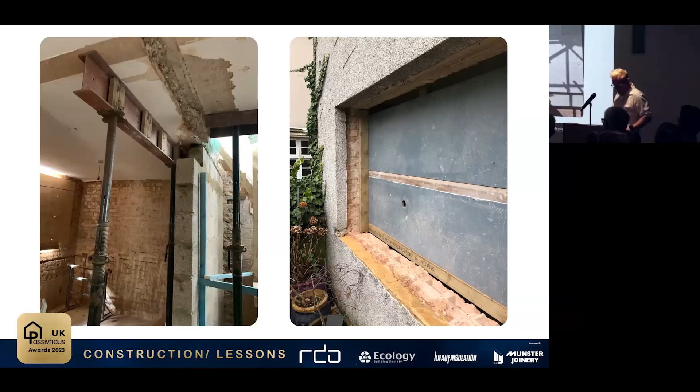Staggered insulation was used on the outside. The existing pebble dashing was removed and insulation was installed on the facade. Difficulties occurred at the junctions, particularly adjoining the roof with the exterior facade. On one particular side, with the top floor terrace, we had to work around the existing fabric - using both interior and exterior insulation to maintain level access to the terrace, as well as good head height to the internal space below.

The details were the biggest challenge, so we ended up spending a hell of a lot of time detailing this. The other issue is to monitor the process - how do you monitor the process, how do you deal with this?

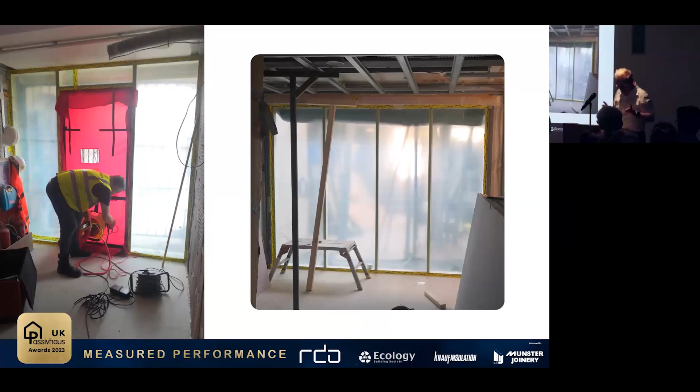What we did was air tests - we did air tests all throughout the process, and it was really important to do the air tests even before we installed the windows. That was something we monitored throughout the process and whilst we were going through it.

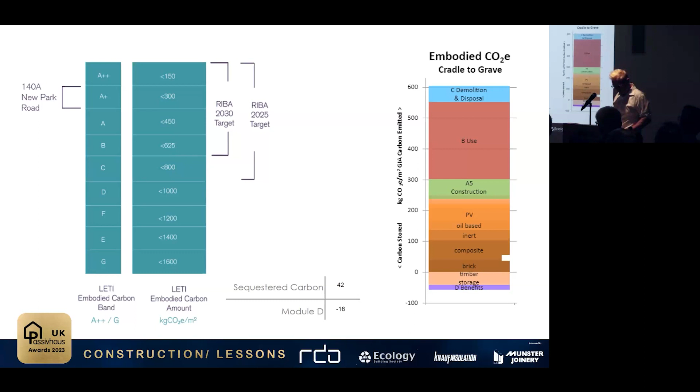Regarding embodied energy, these methods led to the house being regarded by LETI as embodied carbon band A+, and it's also well within the RIBA 2030 and 2025 targets. That's a little bit more detail on this - I'm going to rush through this now.

Comparing with BREEAM domestic refurbishment standards, the building gets the highest credits of 7, which refers to a demand equal or lower than 100 kilowatt hours per metre squared per year. The home consumes 88% less energy than an average UK home in total energy demand per year, according to PHPP calculation. The energy bills are as low as about £940 per annum at the moment.

And this is for a building that really would have been knocked down - it didn't have a great deal of pride in the street. Now you've got this amazing building, which is beautiful both inside and out, and hopefully shows what we should be doing.

I would appreciate if you vote for us, because this shows what we can do and how we can future-proof our cities and create retrofit buildings or commercial spaces that really work. We've got so many of these 60s facades, but we should be looking at them and embodying them. I'm a son of an architect - my father was an architect in the 60s who built new towns. What I don't want to see is all of that stuff being demolished. I would rather see that stuff being refurbished. I think that's the future. Thank you.

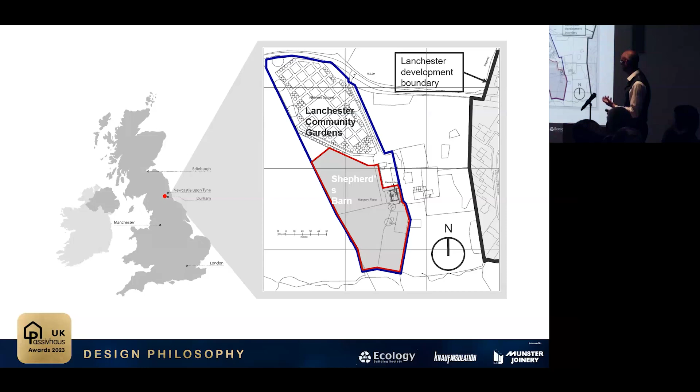The barn itself was in very poor state of repair prior to refurbishment, so a number of walls had to be reconstructed and there was some underpinning that had to happen. There was also an asbestos roof that had to be replaced in this process. What we've done is kept a very large open plan floor area and made use of some small double-height spaces to give a feel for what the barn was like before conversion. We've also got some cellular rooms, which provide the additional levels of privacy you'd expect in a family home.

The views to the south look across the Lanchester Valley towards an old Roman fort, and the deep window reveals provide shading during the summer.

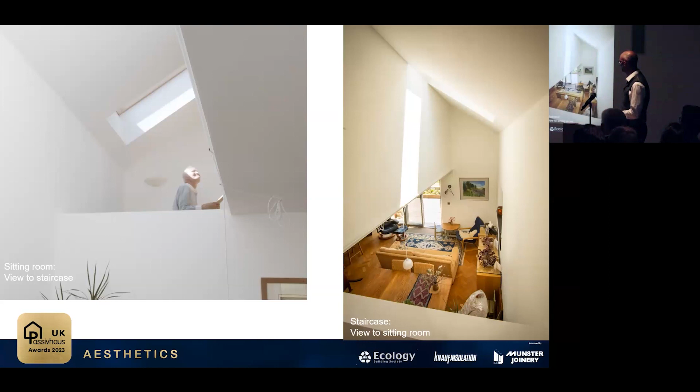There's ample daylight. All of the windows were assessed using daylight factor calculations to avoid the risks of localized overheating. The volumes and spaces all interrelate with one another to give a good overall spatial impression, which led to the project receiving the RIBA North East Awards last year.

All the finishes internally are natural finishes and low VOC, and sticking with the bio-based materials, everything above the floor slab is all bio-based.

Changes to the eaves height and the ridge still fit neatly within the broader area. And over on the west-hand side of the site, there is a photovoltaic array which generates electricity for the project, and there is a power wall as well.

Paul and Sunny Shepherd sit outside on the south and west-hand sides of the property to appreciate the views. The clean, simple detailing for where walls have been reconstructed marries in with the way the building was built in the first place - so we've got brick bands underneath the eaves detail, for instance.

The extensive monitoring that was undertaken shows that whilst the PV array helps to generate or displace nearly 2 tons worth of carbon emissions, because it's connected to the grid, it's responsible for half a ton of carbon emissions, 70% of which occur during the winter. So this pulls out the fact that zero carbon is a bit of a lie.

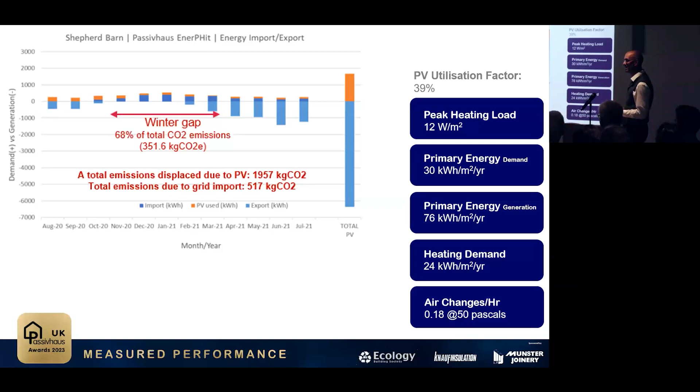You've got the one whereby the peak load and the space heating demand are such that it satisfied the space heating demand method for Passive House EnerPHit, rather than the less onerous component method.

Because of all the energy generated, the PV array generated £1,100 worth of income, and the household bills were £524, which means there's a net profit of £580 a year. So that means the PV array will pay for itself over the course of its life cycle.

The summer comfort - we've monitored over 12 months, and PHPP predicted that the exceedance would be 2% of the year, and in practice we've measured it and it's 0.7%. So all in all, it's performing as predicted, and Paul Shepherd noted that they didn't feel uncomfortable during the 2023 heat wave. The most important lesson was attention to closing windows when the outside temperature was higher. So it's working as predicted and as well as we could have hoped.

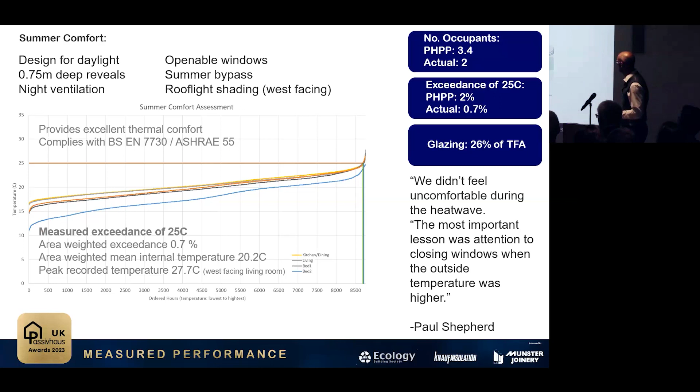In terms of indoor air quality, using relative humidity as a proxy, what we can see is that the humidity remains on average around about 51% and well within acceptable and ideal ranges.

Having taken part in the Passive House Challenge during 2021, the property went for 10 days without heating and was above 18.5 degrees Celsius after that period.

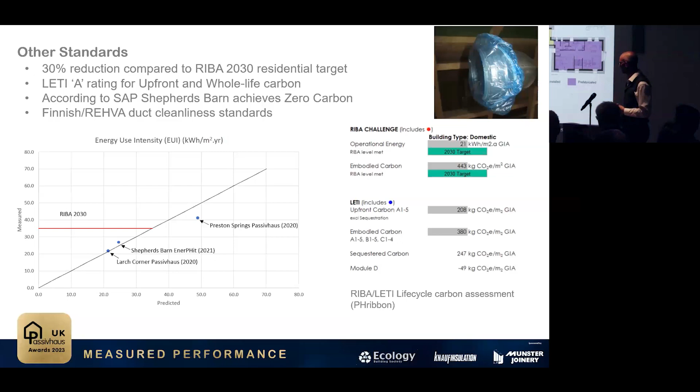We used some timber frame to assist with prefabrication of the project, which meant that Paul and Sunny could undertake the work as novice builders, which helped to reduce the construction timeline and also reduced health and safety risks on site. So thanks to Eden Insulation for that timber frame kit.

The raft foundation installation helped to reduce thermal bridging around the floor level, and the air tightness is such that it's the equivalent of basically £4 coins across the entire surface area of the property, compared to 175 if it was to building regs. I've mentioned the low toxicity paints and finishes.

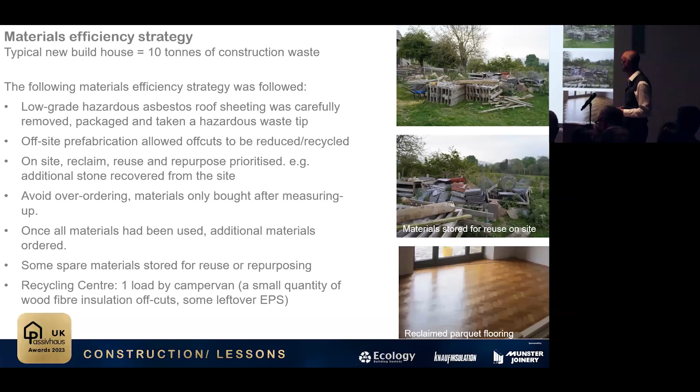So we've got a 10.75 kilowatt photovoltaic array, which is generating all the electricity. And with the embodied carbon calculations that we undertook, we were able to demonstrate that the ones that have been installed actually reduced carbon emissions by around about 90% relative to other PV panels that have been used on other projects.

There's over 110 trees that have been planted and 4 Miyawaki forests, which means that there is sequestration taking place somewhere between 1 and 4 tonnes per annum. So if you take that into account with the half-ton carbon emissions that arise, then we could start to say it's something equitable, but I'm always very cautious about calling it net zero of any kind.

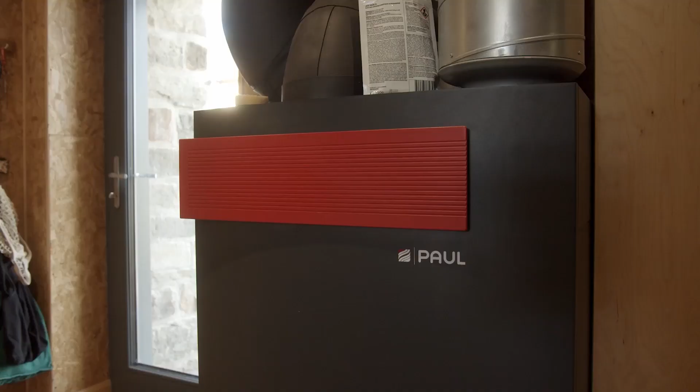So how are you finding living in the house? I'm really, really happy. I think it just feels very comfortable. The links to the outside, I really enjoy. The terrace is like an extra room, which we use a lot. Air quality is fantastic, the light is good. We use all aspects - like the west side, we come out and sit here and have meals quite frequently. We've got a sunken area on the south side that we can go to if there's strong southwesterlies coming in. So it sits in the environment really well. It's not a massive house, and I wouldn't want a massive house. It's plenty big enough when we have the family round, but it's also not so big when there's just the two of us.

It's very easy to live in, it's comfortable. We know it uses very little energy, which is the big thing. That's what we really wanted, was a house that didn't use much energy, and we know it doesn't. We're completely self-sufficient, so we've got zero energy costs. We're actually exporting to the grid. So really, we only have a couple of radiators on for a few hours a day for a few months of the year.

Thank you, Mark. What a fantastic project. Really interesting as well to see that kind of holistic sight, to think about how that impacts how our buildings sit in the world.